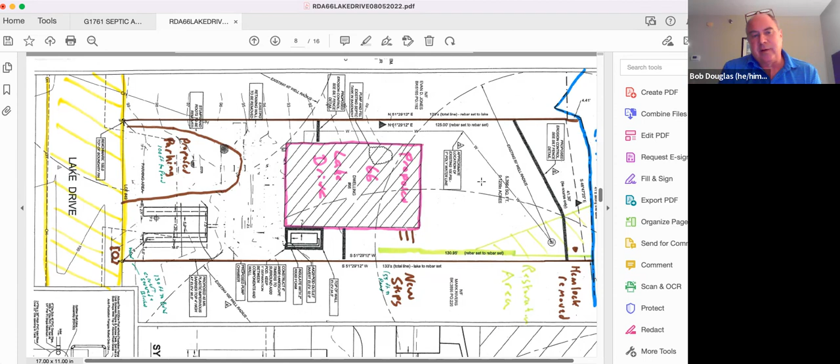There's something missing from this plan - the planter. Do you have another version? I was trying to find it. You may have sent me a revised one, and I don't see it. I can simply describe for you where it is if you like. Well, it's right here in this section.

So you can see where the existing drain is by the brackets. I think right where you've got your cursor would be the position of the planter, which would protect that leach field you see, represented by the two tubes to the right.

And Bob, you're wanting to raise the grade of your proposed parking area above the grade of Lake Drive, is that correct? Yes, that's correct. How much are you wanting to raise it? I'm not quite sure, 4 inches perhaps. I'm not sure.

And the thinking would be that water would shed this way, off of the driveway? I've been asked to stop pollution from entering the lake through my property, and I believe closing off the pipe at the front of my yard would be the most effective way to do that. Again, the lake is owned by an entity, an environmental organization, the Lake Wyola Association, and it's their responsibility for the road. I don't have an easement across my property to allow them to continue discharge across my property.

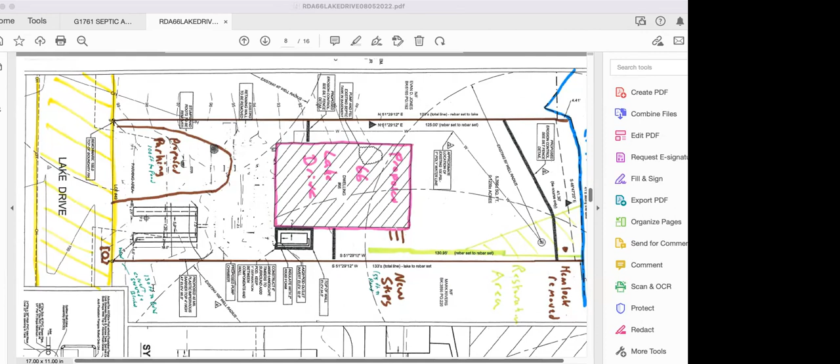Do other people have some questions? I have more questions, but... Scott, do you want me to leave it at this? Scott and Mary, do you have some more comments or questions? I don't, I've been there and I don't have any additional questions. Yeah, I've gone on several of the site visits too, so I've looked at it. Okay, I have some thoughts about it.

There has been a request made by a member of the public, or by the Lake Wyola Association, asking us to require you to get an engineered design. I've been thinking about that. We have the authority to waive the requirement for an applicant to provide an engineered design. In this case, your property is not subject to the stormwater standards. You're clearly attempting to restore a degraded site and improve it, and much of the work you're proposing is protective of the interests we're charged with protecting through our regulatory work.

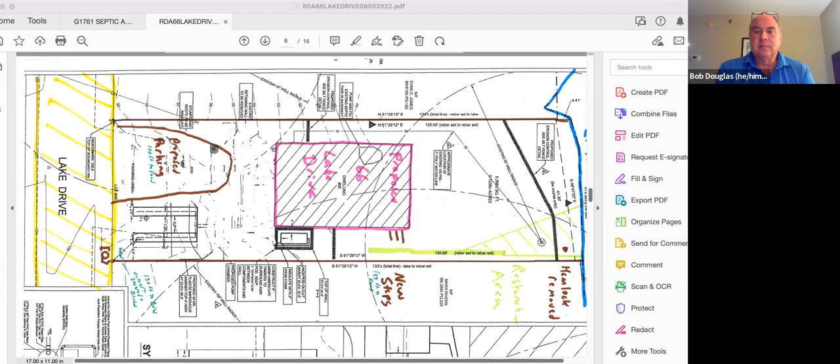You have given us an engineered site plan from the septic design, which shows the grades, and not much has changed. As far as I'm aware, nothing has changed in the configuration of your property since that engineered study was designed. So really the question is, what would be gained from requiring you to hire a civil engineer to do stormwater calculations?

My own feeling is that to really do justice to that - because we can see there's stormwater historically collected onto your property that came not just from your local area on the road, but was storm flow concentrating from other areas up gradient - you wouldn't be able to model this effectively without doing a whole watershed analysis. I think that needs to happen, but I'm not sure it's reasonable to expect an individual landowner attempting to repair their property to undertake that kind of effort. Without that, I'm not sure we'd get much that would be meaningful, so I'm inclined not to suggest we require that of you.

Maybe that's one of the issues we could discuss as a commission, and we could hear from the other commissioners. I think you have the right to request a permit for your property. And right now our jurisdiction is kind of focused narrowly on the application before us. We don't have the right to just put somebody's application aside, delay it, or deny it unless we have a preponderance of credible evidence from competent sources demonstrating that doing so would be most protective of the interests we're charged with protecting.

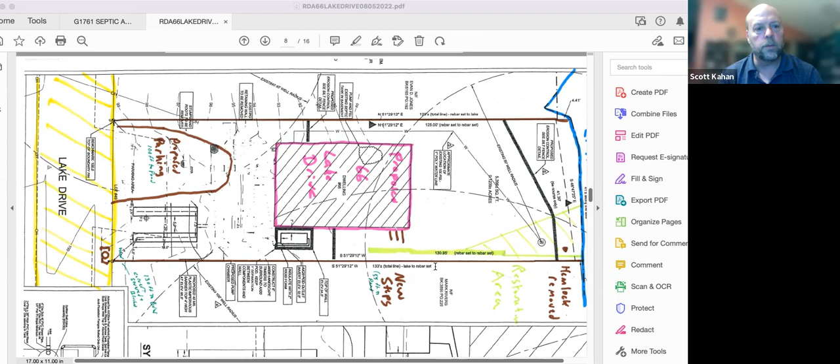But I agree, I think the issue before us is removing a drain. So it's pretty clear that this is more protective of the wetlands. It's going to lessen the impact to Lake Wyola. And I don't have further concerns, and I don't think an engineering drawing is going to shed any light on that as far as our jurisdiction is concerned.

But I do think the broader question regarding where an engineering plan could really help is with the whole stormwater management plan for that part of the lake, to make sure that stormwater is being dealt with appropriately and safeguarded in terms of how it's discharged ultimately into the lake or any other area. I think that's a broader question.

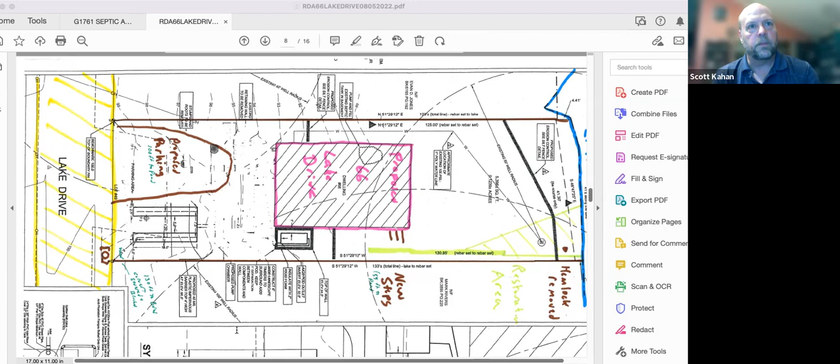That's really where it should be dealt with, in my opinion. So it's a long way of saying I agree. I don't think requiring that of the applicant is where we need to go.

I agree too. I think the stormwater runoff is a broader issue that really involves more people, the owners of the road, the owners of the culvert, and they may already have a plan. I don't know what the plan is for looking at it, but it's not a plan for the individual homeowner to be able to resolve that issue.

I think it's worth noting that we're trying to look at each site and each project on its own terms and merits, and that each site has its own challenges and is unique in some ways. So we may not treat all properties the same. Factors we might look at are the slopes on those properties, the degree of change in pervious versus impervious surfaces, the degree of degradation being addressed, the size of the lot, and how much space there is to work with. On this lot, my observation is that it's a fairly small parcel compared to other properties along Lake Drive. He's got small side yard clearances and doesn't have a lot of space to work with and make modifications.

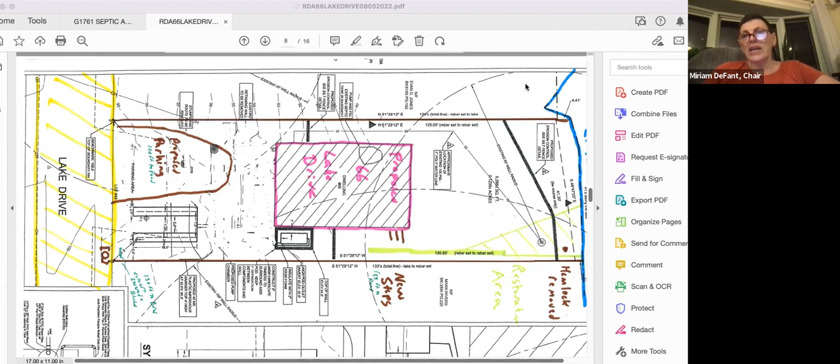All right, let's get some, we can have some more discussion, but I know there's folks from the public waiting with their hands raised. I know Jan had her hand raised first. Could you just identify who you are for the minutes, please, Jan? Do you want to take the plan down? I can take the plan down. And also I want to remind people, we have a policy of asking members of the public in public hearings to limit their comments to no more than 2 minutes, and to try to give as many people an opportunity to talk as they want before we give people second chances. So just keep that in mind.

Go ahead, Jan. My name is Jan Rowan. I'm at 55 Lake Drive, just down the street. I've been here for about 25 years, and I've watched the water flow on the road. I've watched it flow towards Bob Douglas's Airbnb, and I've watched it flow under his house. When they did the rebuild, they had a swale on one side where the drain is, and the drain made sense to try to keep that swale from washing out. So I don't think it's a good idea to block off that drainage. It seems that Bob thinks his property shouldn't take any drainage, but all of our property does somewhere.

And you've required it of the two rebuilds just down the street in the past two years. 32 Lake Drive had to put in a rock drain and they did a nice job. Hopefully it will work when it rains. You made Mike Stotz put in retention ponds - he had a little more space. So I don't understand how you can conclude that this case is different and should not take any drainage, because what you're doing is pushing all that water back into the road, which is going to destroy that segment of the road.

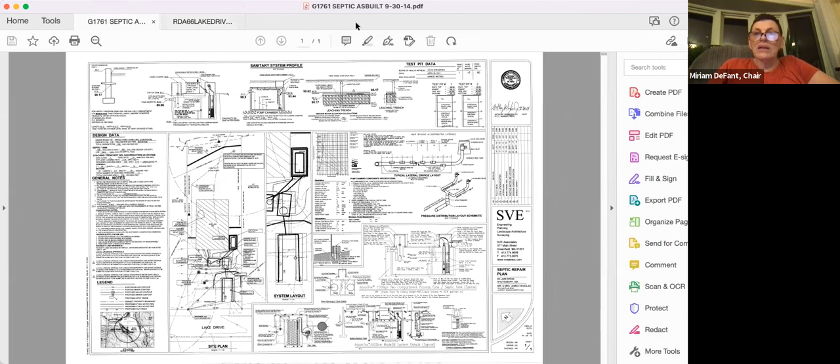I will try to share it. It's a big sheet, and when I zoom in Adobe doesn't behave very well. Can you see this? It really doesn't have the topographical elevations on it... actually it does, I just have to zoom in a tremendous amount.

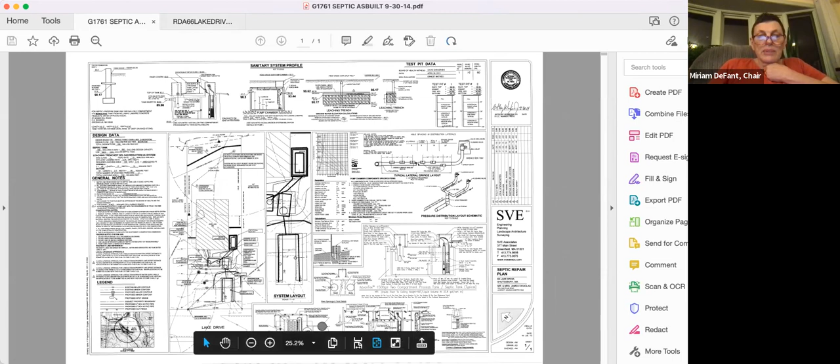There are the grades on it, it's just hard to see. There are elevation marks, so let's see if I can get to it. I believe there are elevations on here. Yeah, okay, so the right side of the property, which would be considered the south side, is lower according to those elevations. Is that what I'm saying?

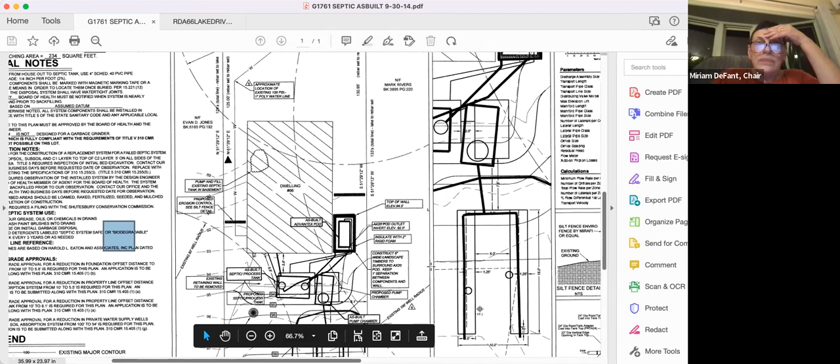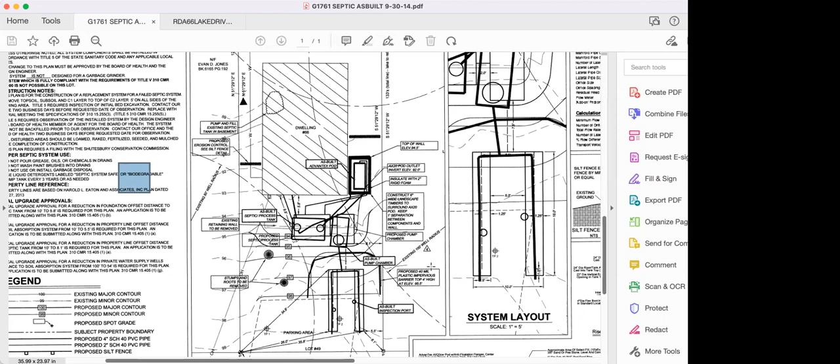Bob, I can't see the print very well on my screen, can you repeat the question please? On the property, the south side, which for people who don't know where south is, towards the rivers, is that the lower part, toward the middle of the house, or which way is the water? If this thing is blocked up, which way is the water going to flow naturally? It's a fairly flat grade there.

Just trying to take a look at what's on the map there. Yeah, I really couldn't say which area is low. It's fairly flat from side to side, as I recall. It's only 40 feet or so. Okay.

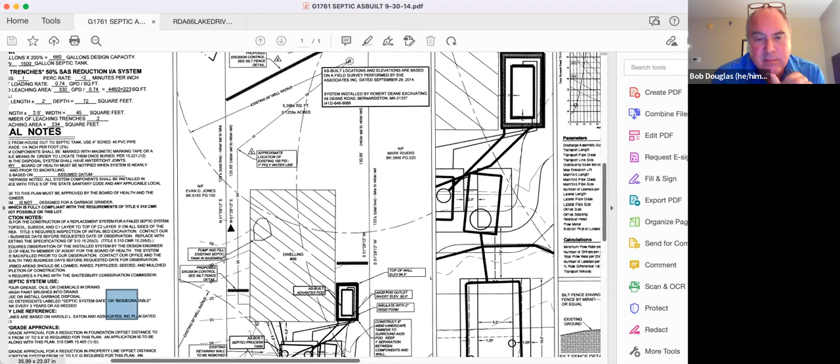It looks like the total elevation change up here says 96 feet, and then I'm trying to see what the lower elevation is down by the lake. I'm sorry, George, was your question kind of left to right on this? Well, my question is, if that's blocked up and water flows to the low point, where is the water going to go? Yeah, I really couldn't say, I think it's fairly flat there.

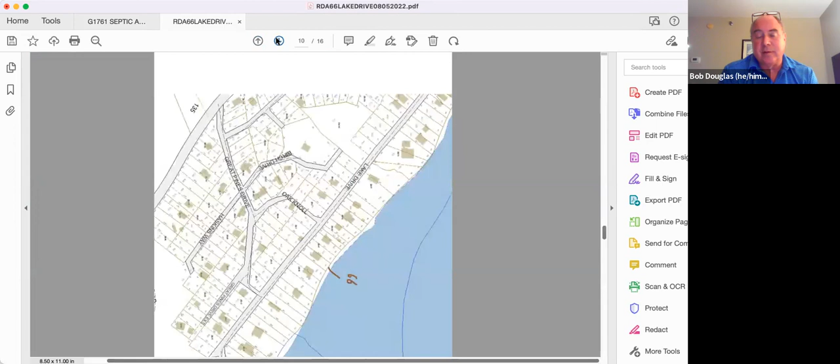I'll stop sharing and see if I can pull up one of the site visit forms, I know there were some photographs that we took, because it is helpful to see a picture of it. So give me one second to go to your folder. Site visits would have been...

I hear somebody's cat. It's actually a squeaky door. Oh, is that what that is? Yeah, okay, so this was the August one.

Let me see if there are any pictures. I did not attach pictures. There was also the site visit that we did in April, let me see if I can figure out where those pictures went.

If the commission were to say, Bob, that we did not want to see berming, what would be your sense about how you'd want to treat that?

Honestly, we'd be right back in the same situation. If the commission is seeking to prevent pollution and toxins from going into the lake, as you've seen in the video and photographs I sent, the water is constrained in a giant trough, and it all discharges at my house. So that water, with its contamination and sediment, would still get into the lake.